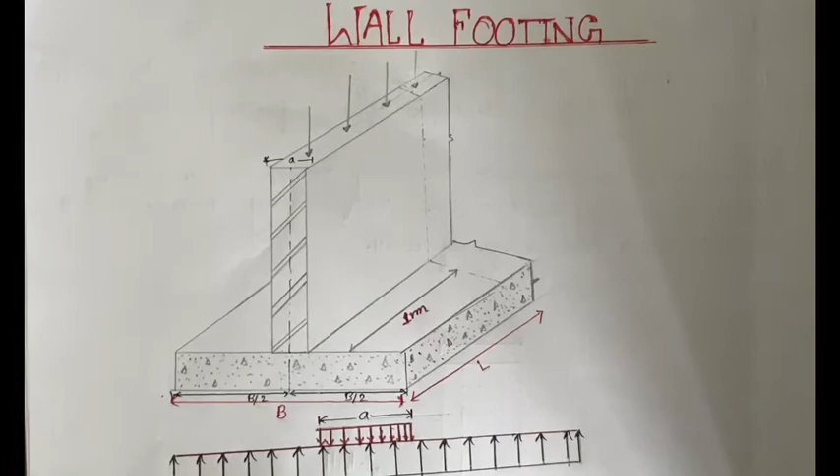अगर जितने भी वॉल जो भी कंस्ट्रक्शन एरिया है दैट इज L इंटू बी, इसके साइड साइड वॉल होंगे, तो जितने भी वॉल होंगे उसके नीचे पूरे पोर्शन में फाउंडेशन देना ही वॉल फुटिंग होता है। मतलब जो भी वॉल है कंस्ट्रक्शन या स्ट्रक्चर में बेस का, उसके पूरे वॉल में फाउंडेशन प्रोवाइड करना इज द वॉल फुटिंग। पहले क्या हो रहा था कि कॉलम में फुटिंग प्रोवाइड कर रहे थे।

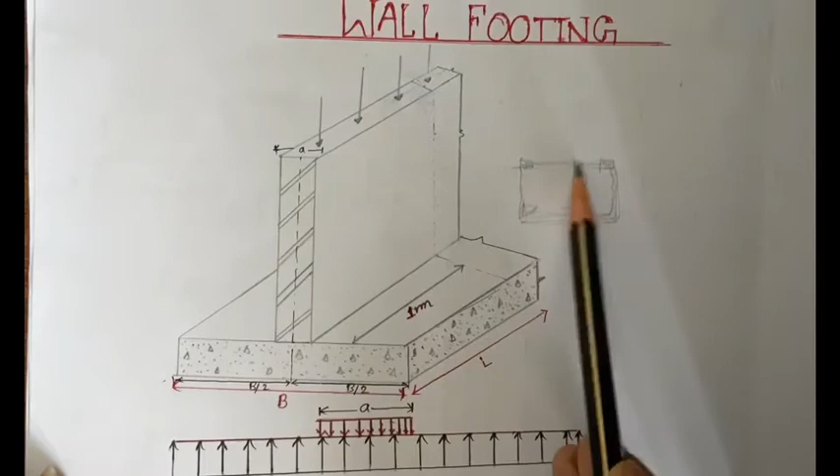यहाँ जैसे कॉलम है तो उसके लिए जो बेस प्रोवाइड कर रहे थे फुटिंग, यहाँ कॉलम है, यहाँ कॉलम है, तो उसके लिए फुटिंग प्रोवाइड कर रहे थे। अब वॉल फुटिंग में क्या करना है कि जो भी हमारा स्ट्रक्चर है, जो भी हमारा वॉल है, उसके पूरे वॉल में फुटिंग प्रोवाइड करना इज द वॉल फुटिंग।

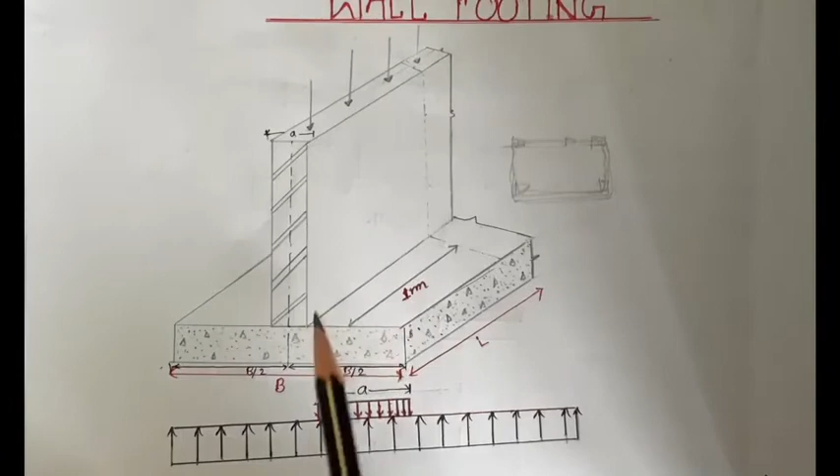सो दिस इज द फिगर फॉर द वॉल फुटिंग। This is the wall and this is the footing for the wall. B, width of the footing, and this is the thickness or depth of the footing, and this is the L. L कंटिन्यूटी साइन से मैंने दिखाया है क्योंकि लेंथ जितना भी वॉल का होगा वहाँ तक कंटिन्यू करेगा लेंथ ऑफ द फुटिंग। जितना भी वॉल का लेंथ होगा क्रॉस सेक्शन का उतना ही फुटिंग का भी लेंथ होगा, इसलिए मैंने 1 मीटर शो करा है कि हम जो डिजाइनिंग करेंगे वो लेंथ इक्वल टू 1 मीटर लेंगे क्योंकि कंटिन्यू कर रहे हैं। जितना मीटर का वॉल होगा उतना मीटर लेंथ फुटिंग का होगा।

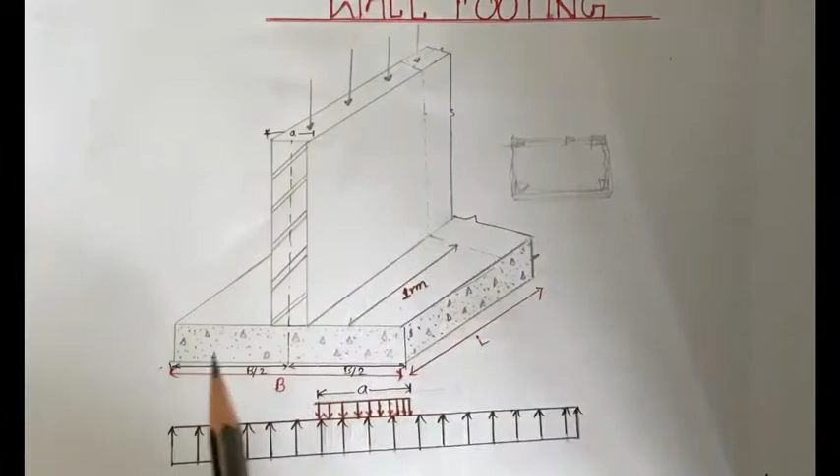यहाँ हमें विड्थ फाइंड करना है, डेप्थ फाइंड करना है, और जो L हम लोग यूज करेंगे वो 1000 mm लेके चलेंगे। This is our wall and load is coming here and transferring to this footing. So a footing regarding all the wall is known as wall footing.

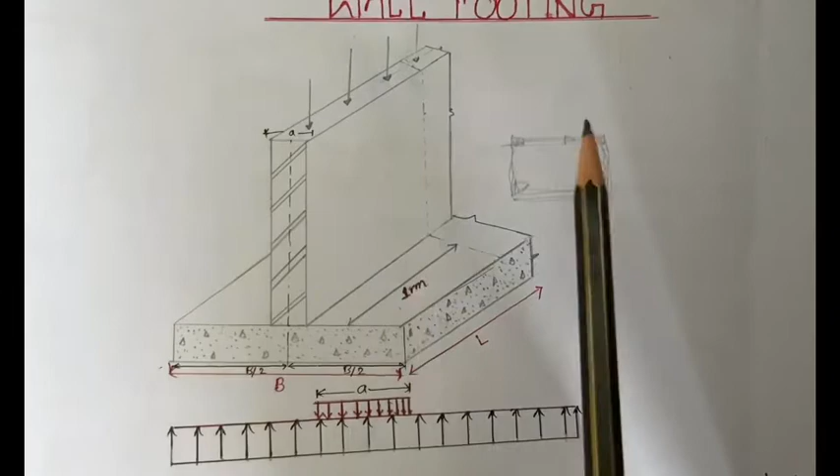This is the soil bearing pressure and this is the load coming on it. This is the footing and this is the earth pressure, SBC, soil bearing capacity, and this is the load coming through the wall on the footing. Here is the definition for wall footing.

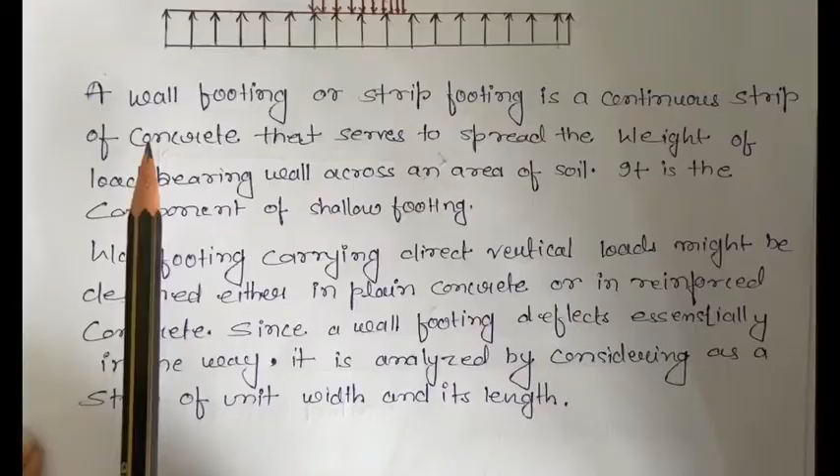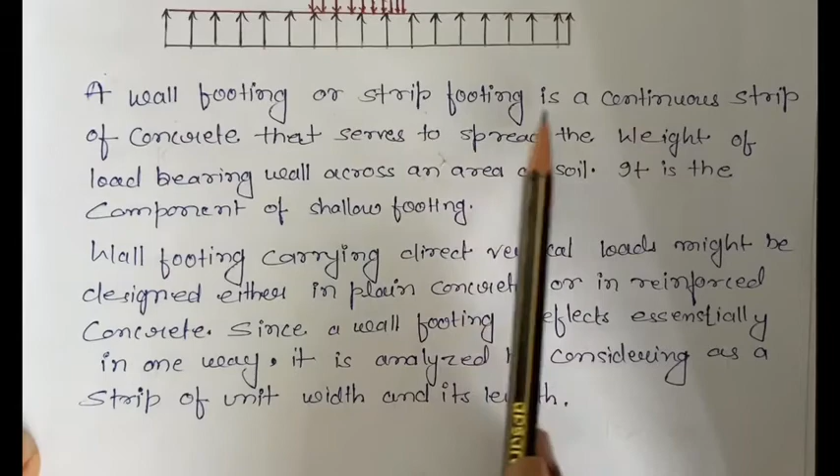A wall footing or a strip footing, wall footing is also known as strip footing, is a continuous strip. Continuous strip in the sense कि जितना भी वॉल होगा उसके continuous footing देते जाएंगे। So it is a continuous strip of concrete that serves to spread the weight of the load bearing wall across an area of the soil.

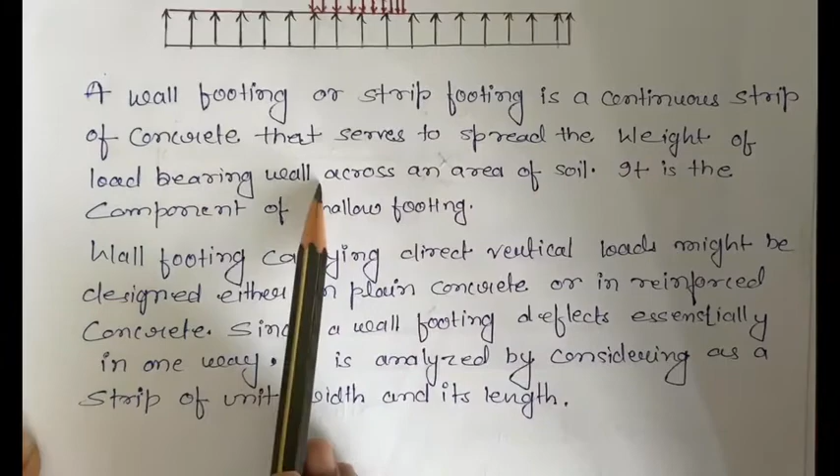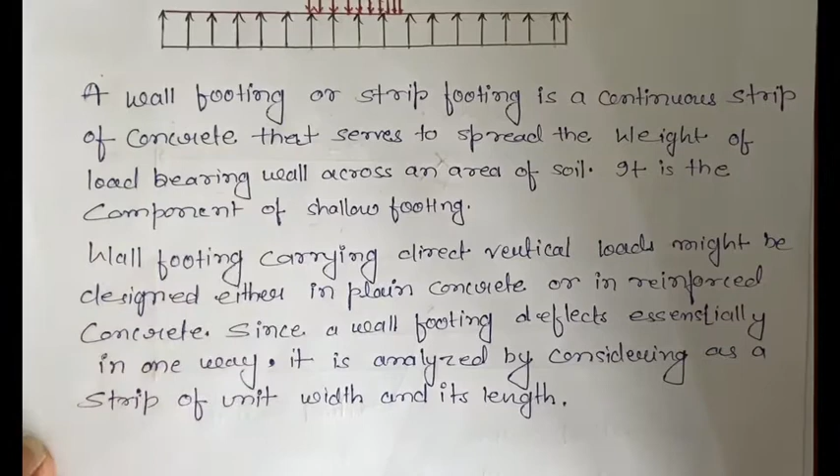It is the component of shallow footing. Wall footing is the part of the shallow footing. एंड वॉल फुटिंग, जो हमारा वॉल का फुटिंग हो गया वो क्या वियर करता है, जो हमारा लोड वियरिंग वॉल है वो लोड जो ट्रांसफर कर रहा है स्ट्रक्चर का वो हमारा वॉल फुटिंग वियर करता है।

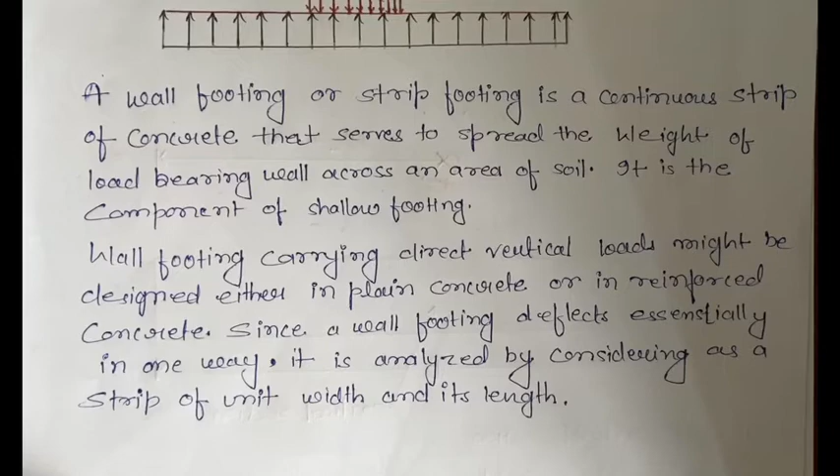लोड वियरिंग वॉल जो ब्रिक वॉल है, साइड का वॉल, पार्टीशन वॉल जो ब्रिक से बनाया गया है दैट इज लोड वियरिंग वॉल। एंड जो पार्टीशन वॉल कहीं कहीं होता है ऑफिस वगैरह में, या जब हम पार्टीशन वॉल देते हैं प्लाईवुड से, ग्लास से, इन दैट केस दैट इज नॉट आ लोड वियरिंग वॉल, दैट इज ओनली अ पार्टीशन वॉल विच इज नॉट टेकिंग एनी लोड ऑफ द स्ट्रक्चर।

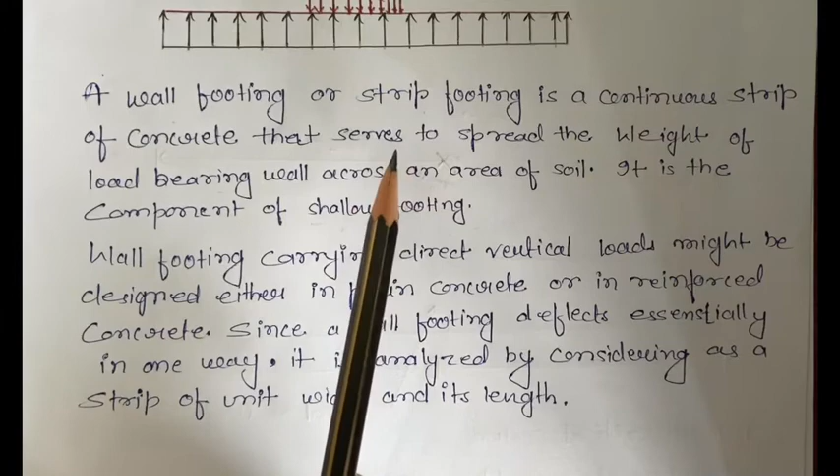लोड वियरिंग वॉल क्या होता है, जो ब्रिक वॉल है जो हमारे स्लैब से कनेक्टेड होगा दैट इज द लोड वियरिंग वॉल। Wall footing carrying direct vertical load might be designed either in plain concrete or in reinforced concrete.

Since a wall footing deflects essentially in one way, it is analyzed by considering it as a strip of unit width and its length.

Wall footing है, कैरी कर रहा है डायरेक्ट लोड, माइट बी डिजाइन आइदर बाय प्लेन कंक्रीट, या तो प्लेन कंक्रीट के थ्रू हमने डिज़ाइन कर रखा हुआ ये फुटिंग को, और रिइनफोर्स कंक्रीट। जब फुटिंग हम लोग कंस्ट्रक्ट करते हैं तो हमारे पास ऑप्शन है कि प्लेन कंक्रीट के थ्रू भी कास्ट कर सकते हैं हमारा फुटिंग, और रिइनफोर्स कंक्रीट के थ्रू भी फुटिंग को कास्ट कर सकते हैं।

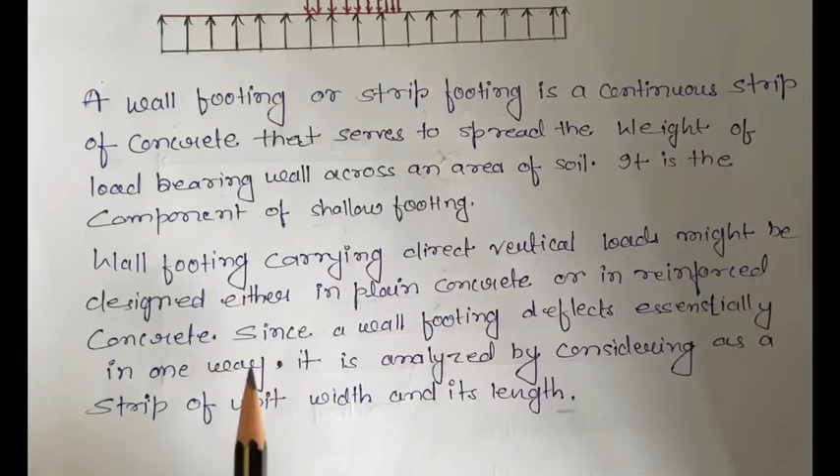सिंस अ वॉल फुटिंग इज डिफ्लेक्ट इसेंशियली इन वन वे, ये हमारा वॉल फुटिंग का प्रॉपर्टी है कि जो डिफ्लेक्ट करता है ओनली वन वे डिफ्लेक्ट होता है। It is analyzed by considering it as a strip of unit width and its length.

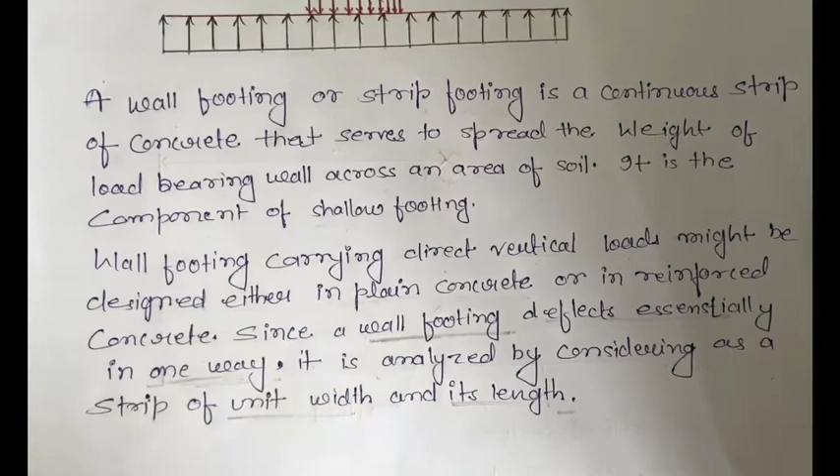Now for bending moment in wall footing. Bending moment का calculation कैसे होगा wall footing में?

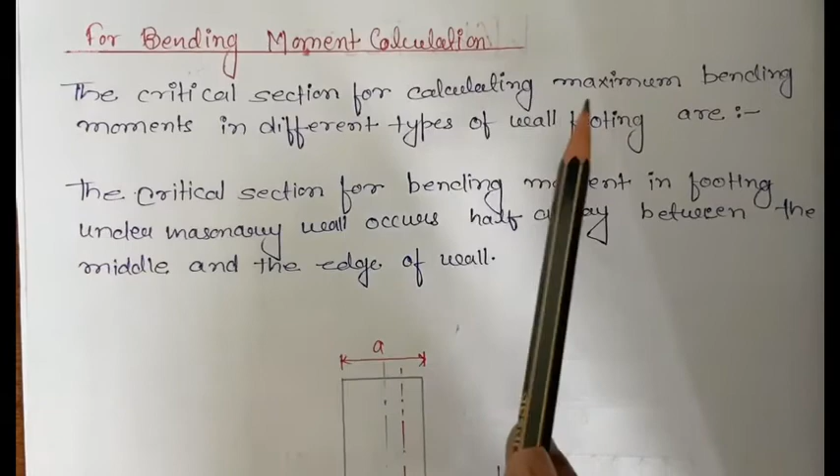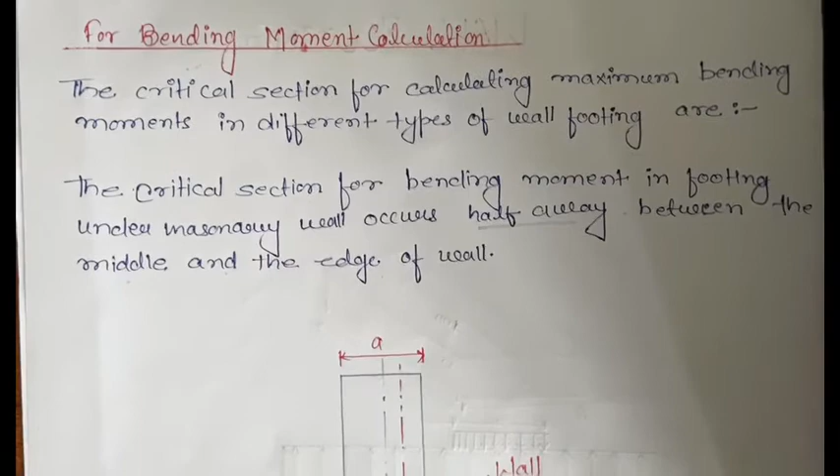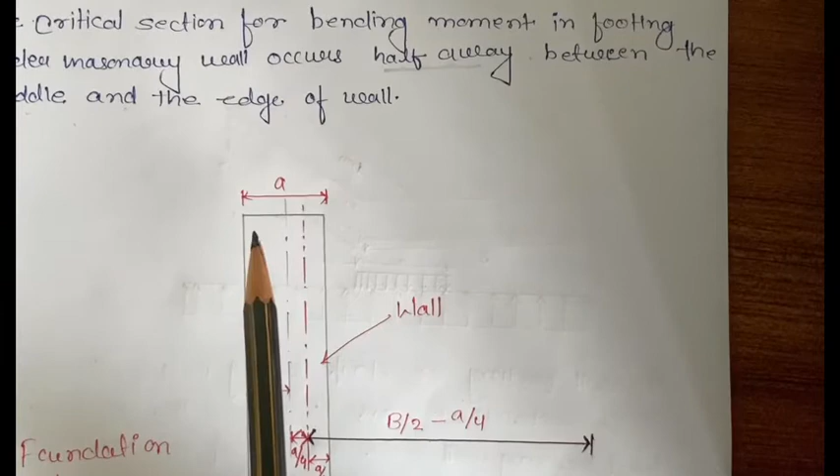The critical section for the calculation of bending moment in the different type of wall footing: the critical section for the bending moment in the footing under the masonry wall occurs half away between the middle and the edge of the wall. जो हमारा critical section develop हो रहा है, यहाँ develop हो रहा है, that is the half away between the middle and the edge of the wall. Okay, this is our critical section.

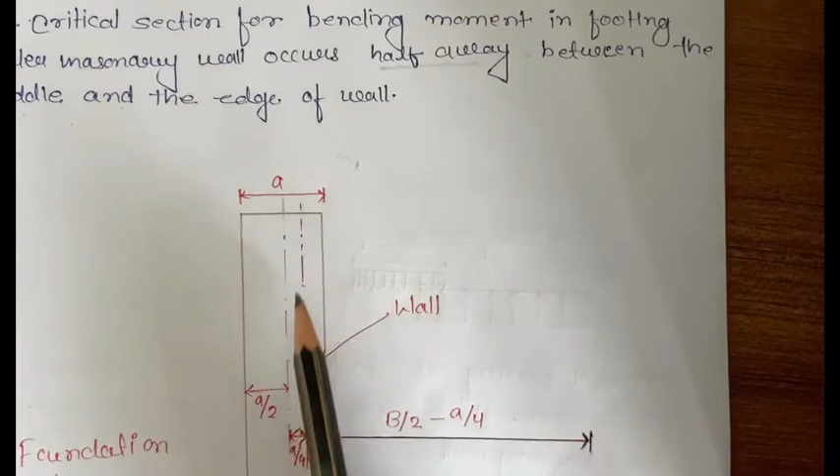This is the thickness of the wall and this is the midpoint of that wall. The critical section for the wall footing lies between this point and its middle.

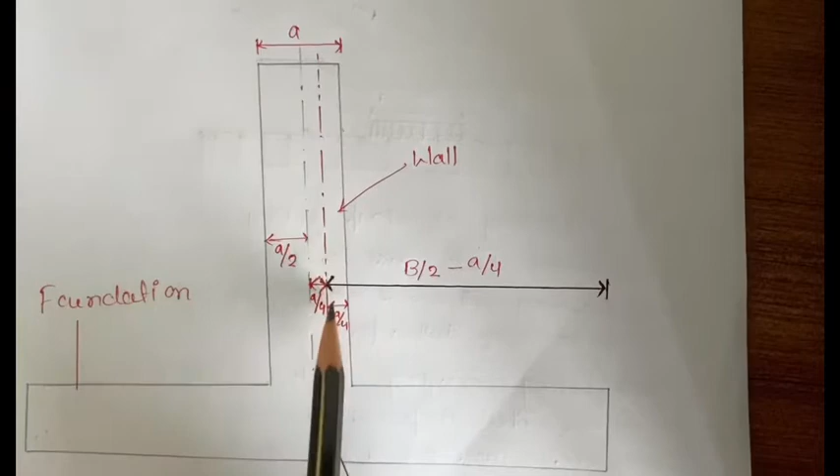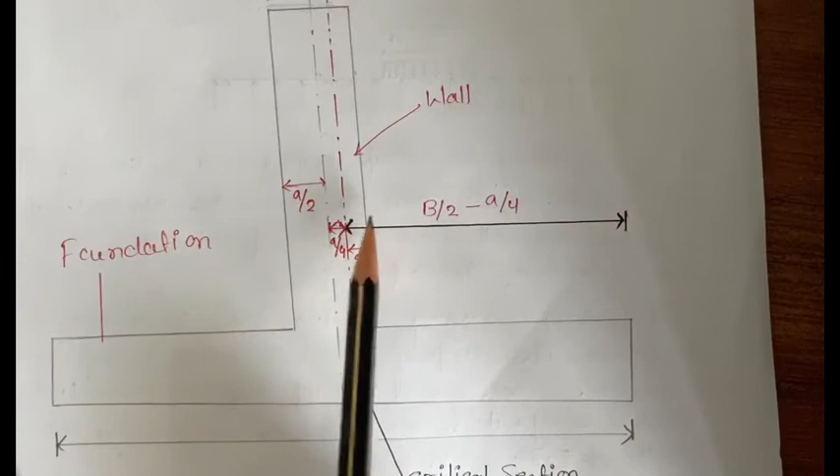This is the figure for the wall footing. This is the thickness of the wall and this is the footing. Here to here the length is B by 2, that is this is B and this is half of B. So up to this length B by 2, subtracting this length minus A by 4. So from here to here the length is B by 2 minus A by 4. This is the critical section line.

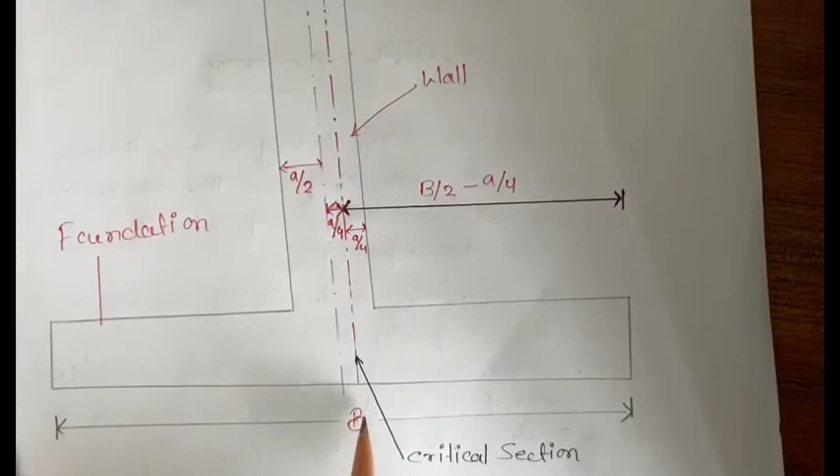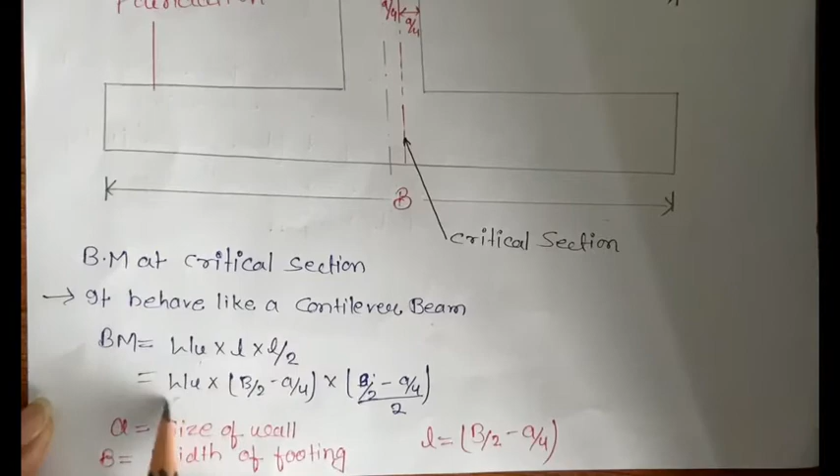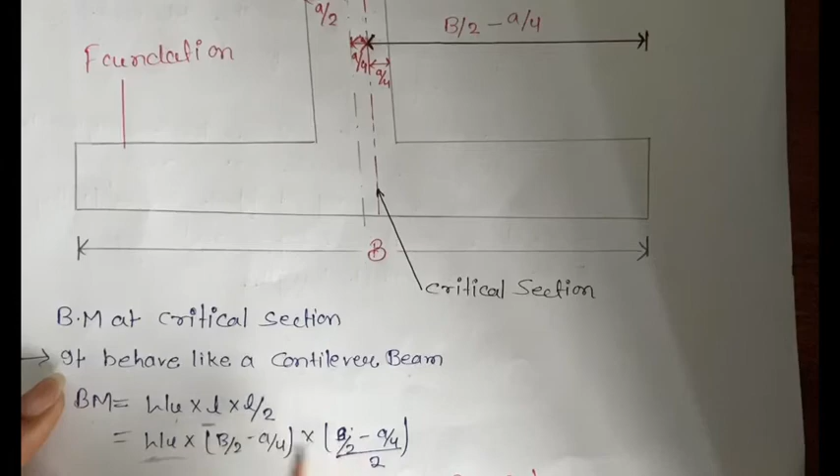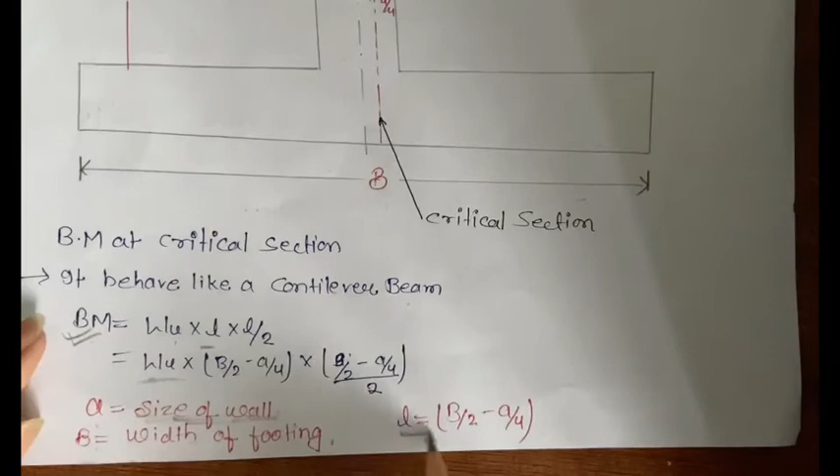Bending moment at critical section behaves like a cantilever beam, since our wall footing behaves like a cantilever beam. So bending moment equals WU into L into L by 2. WU is the load given, and B by 2 minus A by 4 is the length. We need to find bending moment at the critical section, so we multiply this length into the load. So it is B by 2 minus A by 4, into B by 2 minus A by 4 divided by 2. This is the bending moment formula for the wall footing. A is the size of the wall, that is the thickness of the wall, B is the width of the footing, and L is B by 2 minus A by 4.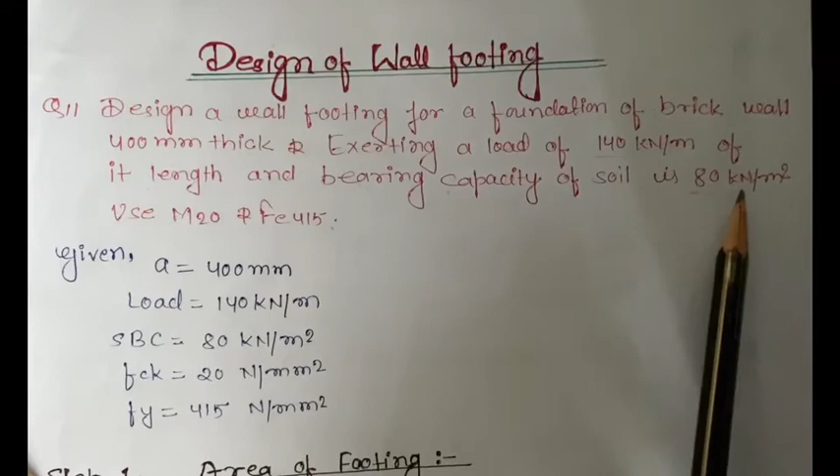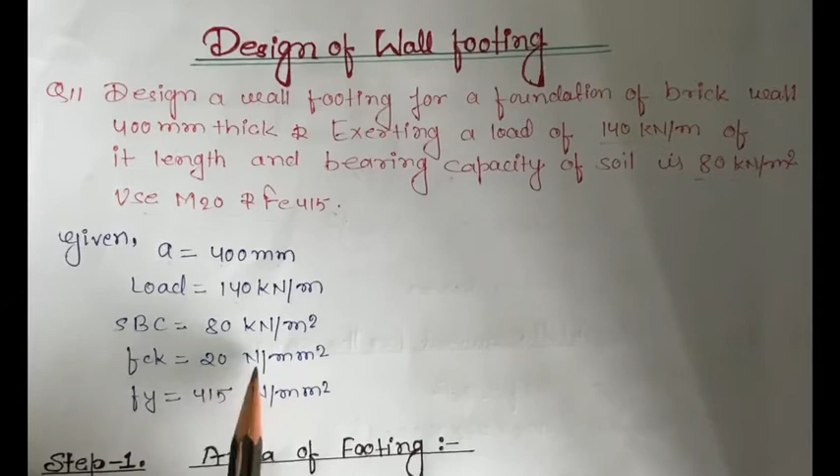Now we will go for the design of the wall footing. Design a wall footing for a foundation of a brick wall 400 mm thick, exerting a load of 140 kN per meter length, and the bearing capacity of the soil is 80 kN per meter square. Use M20 and Fe415. So the given data is: A equal to 400 mm, which is the size of the wall, load equal to 140 kN per meter, SBC soil bearing capacity is 80 kN per meter square, FCK equal to 20 Newton per mm square, and Fy equal to 415 Newton per mm square.

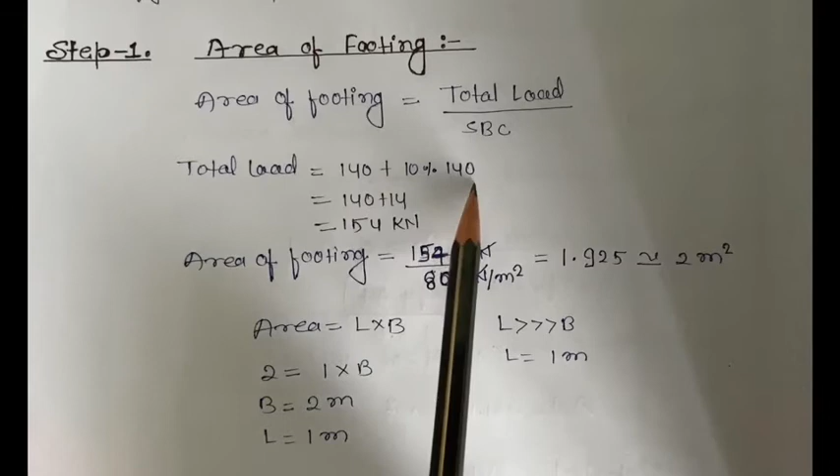In step one we have to find out the area of the footing. Area of footing equals total load divided by SBC. Total load equals 140 plus 10% of 140, that is 140 plus 14, which is 154, the total load. So total load divided by SBC, soil bearing capacity: 154 divided by 80 equals 1.92, approximately 2 meter square for the area of the footing.

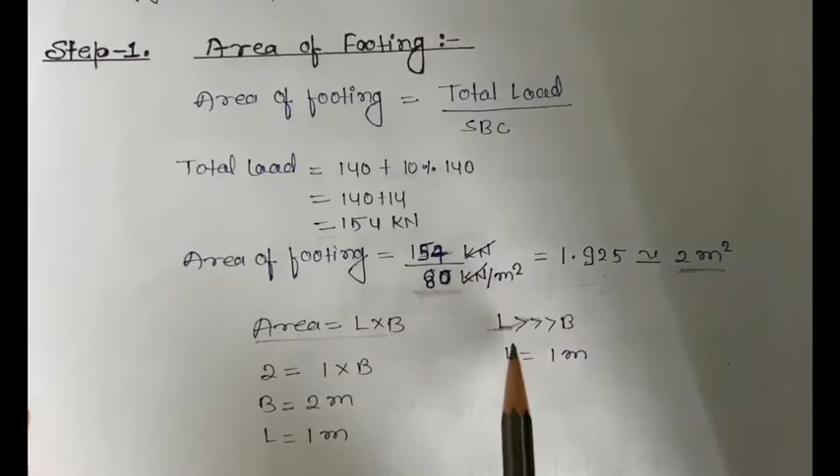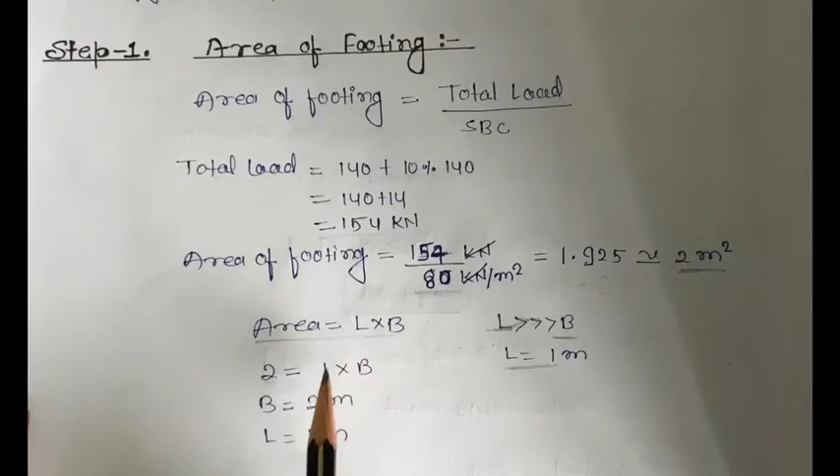The area of our footing should be 2 meter square. Area equals length into B. The length will be as much as the wall length, since wherever the wall is, we need to provide footing alongside it, so the length will be equal to the wall's length. So we are taking L as 1 meter. Now we will find B. So 2 meter square is the area, L we are taking as 1, and B we have to find, so B equals 2 meter and L equals 1 meter.

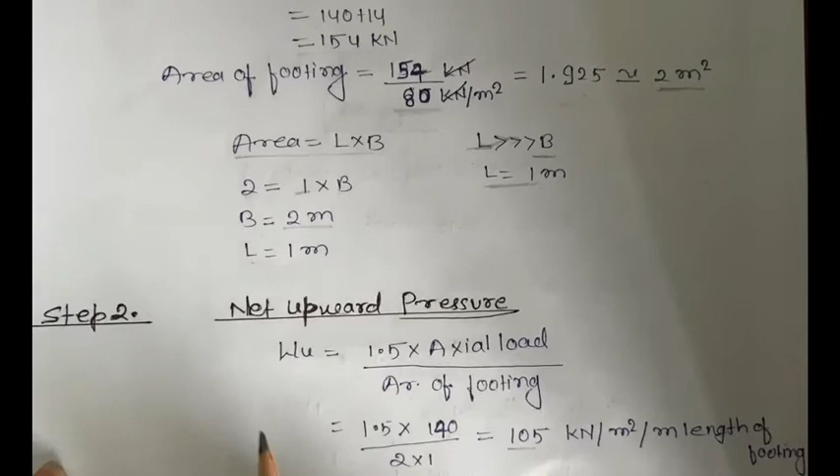In the next step we have to find out the net upward pressure. W equals 1.5 into axial load divided by area of footing. Axial load is 140 kilonewton, factored by 1.5, divided by area of footing, which is 2 into 1 (2 is B and 1 is the length of the footing). So we get 105 kilonewton per meter square per meter length of the footing. This value, the net upward pressure, is for one meter length of footing. For 1 meter it is 105, and for any other length it will be multiplied accordingly. So the value we calculated, net upward pressure W, is 105 for 1 meter.

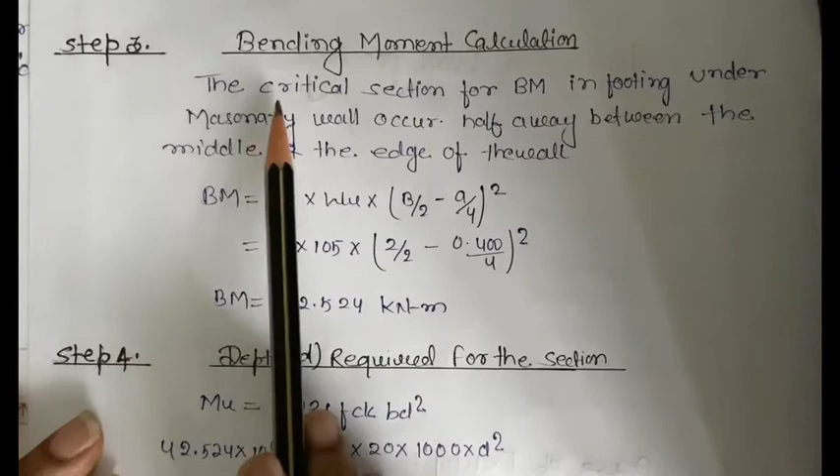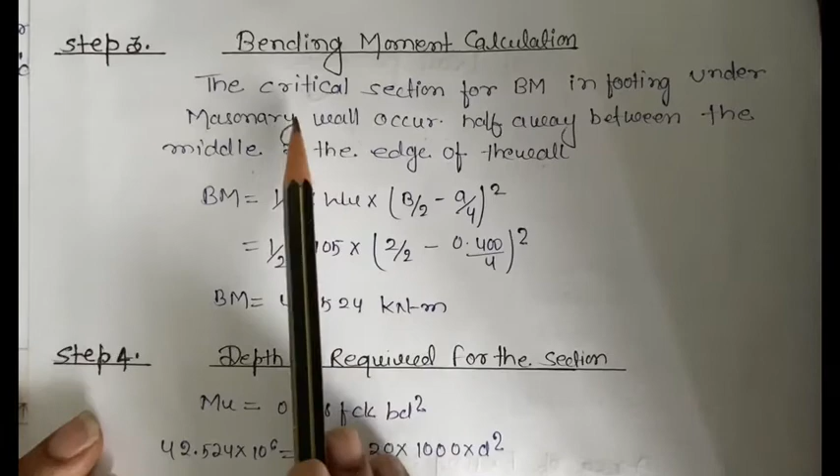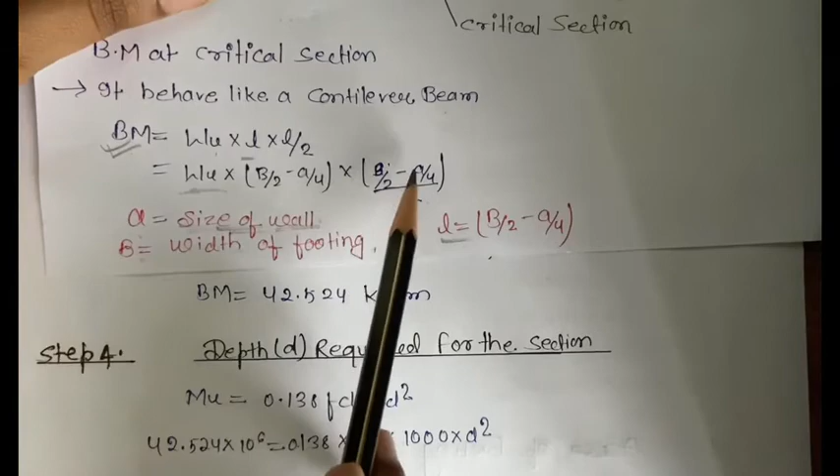Now we have to find out the bending moment calculation. The critical section for bending moment in the footing under the masonry wall occurs halfway between the middle and the edge of the wall. As we just studied, the critical section develops halfway from the middle to the edge of the wall. So bending moment equals half into WU into B by 2 minus A by 4 squared. This formula we are using is WU into B by 2 minus A by 4, into B by 2 minus A by 4, squared, and multiplied by 1 by 2. This is the same formula I showed earlier.

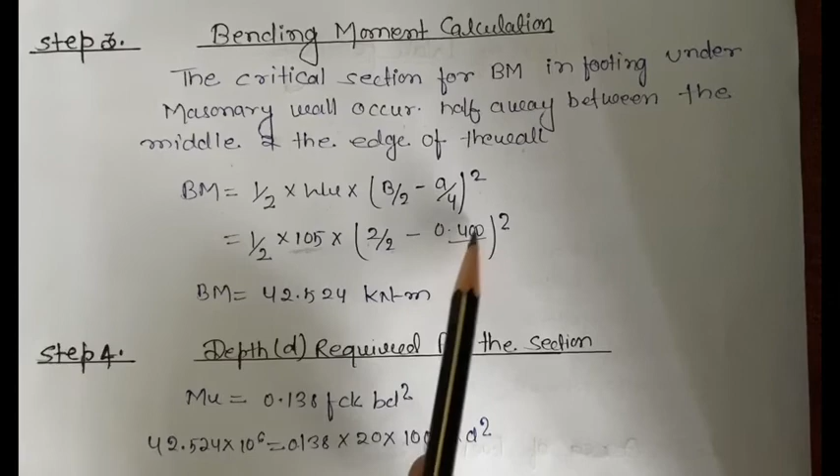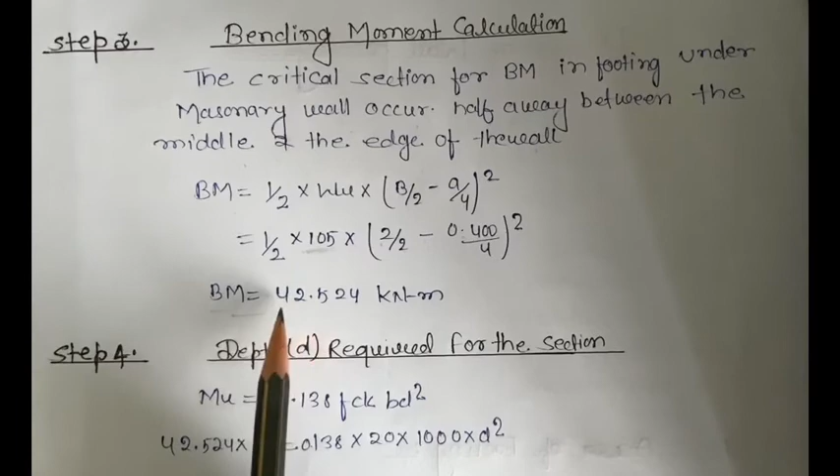Half, W equals 105 as we found, and B equals 2 divided by 2 minus 0.400. A is the size of the wall, which is 400 mm, divided by 4, squared. So we get bending moment equal to 42.524 kilonewton metre.

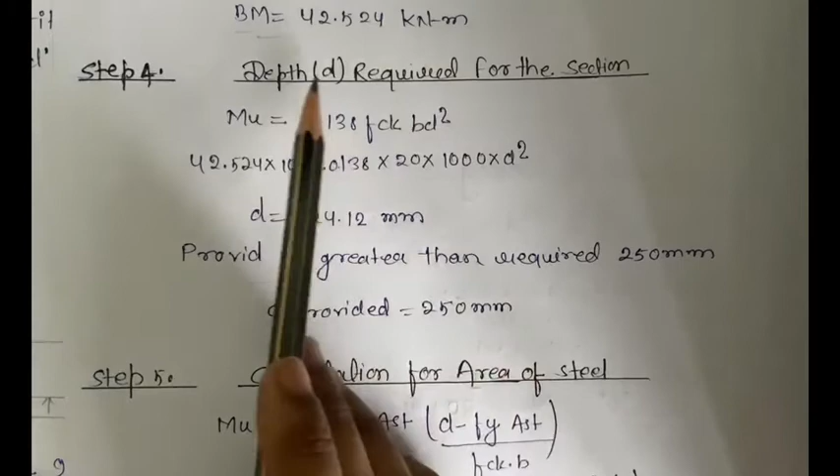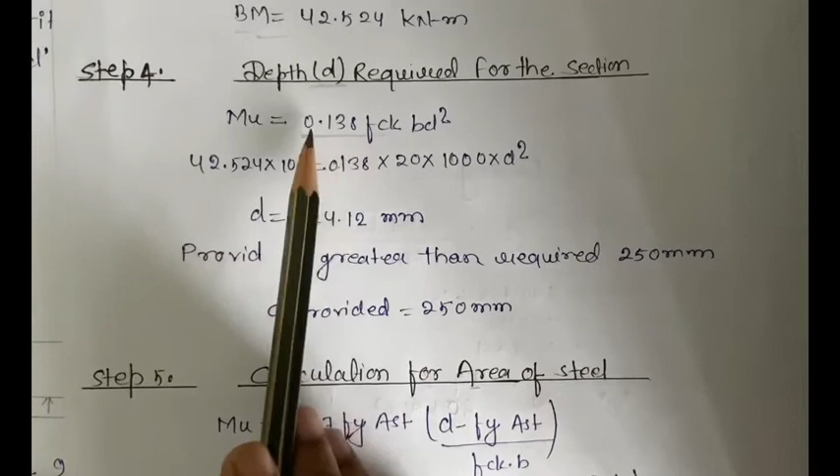Now step 4, calculation for the depth required for the section. Mu equals 0.138, which we take for Fe415 grade of steel, into FCK into BD square. So Mu equals 42.524 into 10 to power 6, equals 0.138 into FCK equal to 20, into B equal to 1000, into D square.

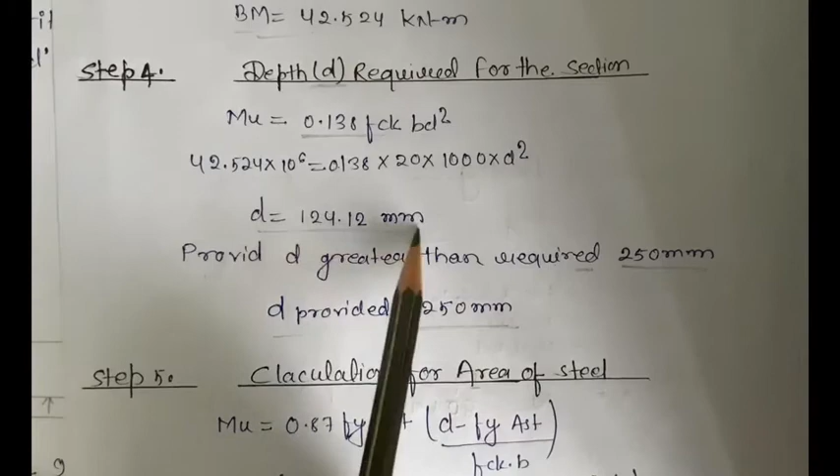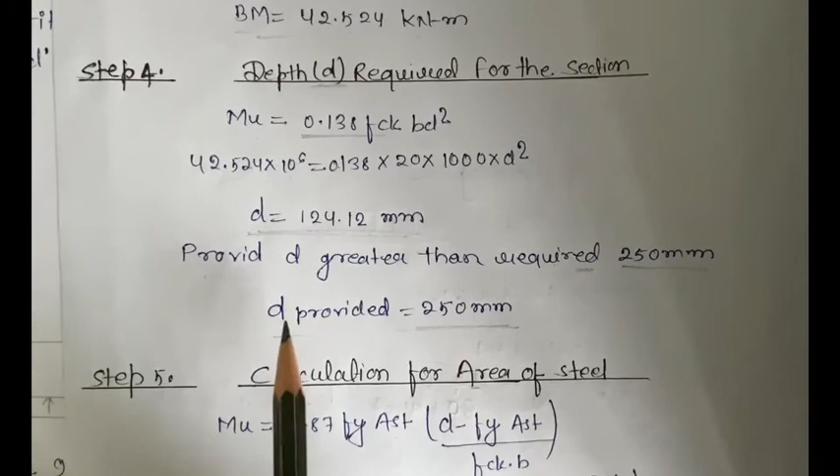So D equal to 124.12. Provide D greater than required, so we are providing 250. This is the depth found out by calculation, but whatever depth comes out, we must provide more than that required value. So we are providing here D equal to 250 mm. The depth of the footing is 250 mm.

Calculation for the area of steel. After the bending moment, we will go for the AST. The formula is mu equal to 0.87 Fy AST (D minus Fy AST divided by FCK into B). By putting all values, we have AST equal to 491.13 mm square.

So percentage of steel equal to AST divided by B into D into 1000, and by solving this we get percentage of steel equal to 0.19%.

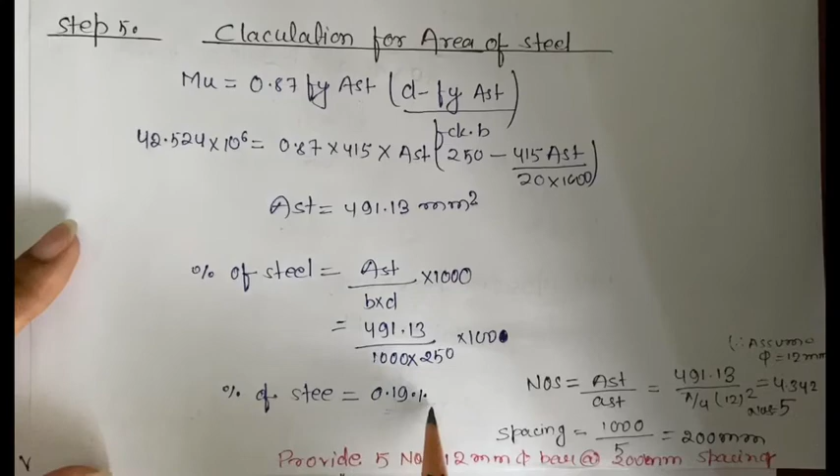Number of bars equal to AST divided by small ast, the area of one bar. So AST equal to 491.13, and small ast, assuming diameter of bar is 12 mm, gives 4.342. Similarly, number of 5 bars we are using.

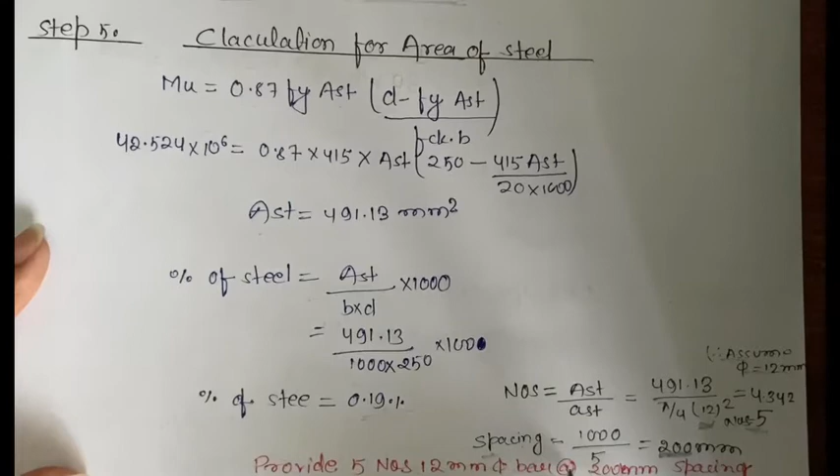Spacing between the bars will be spacing equal to 1000 by 5, so we have 200 mm spacing. So provide 5 numbers of bar of 12 mm diameter at the rate 200 mm center to center spacing.

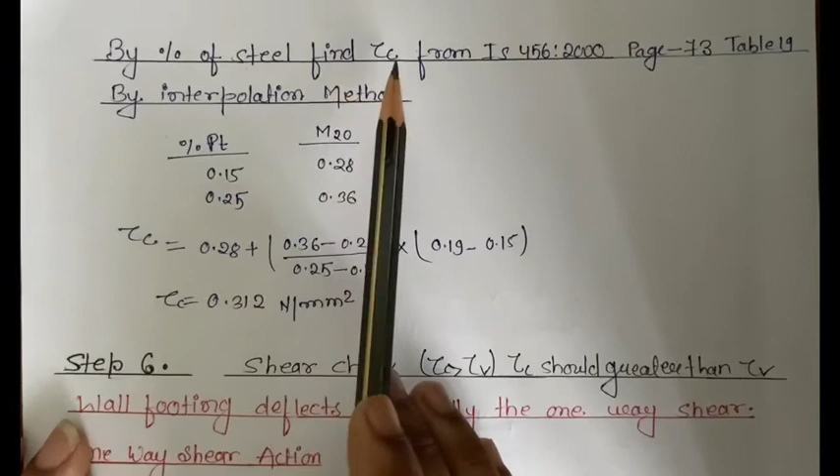Now by the help of percentage of steel found out earlier, that is 0.19%, we will find tau c for shear. We will check whether shear reinforcement is needed or not.

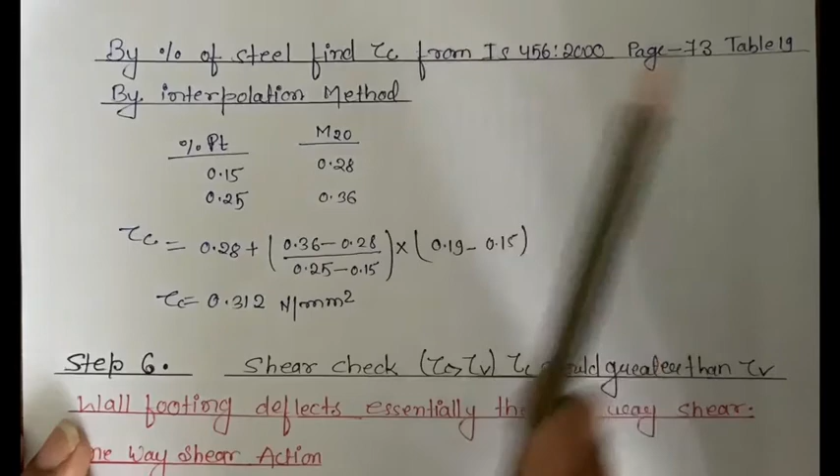So tau c from IS 456, page number 73, table number 19, by interpolation method, percentage of steel 0.19 lies between 0.15 and 0.25, and grade of concrete we have M20, which we are using in the wall footing.

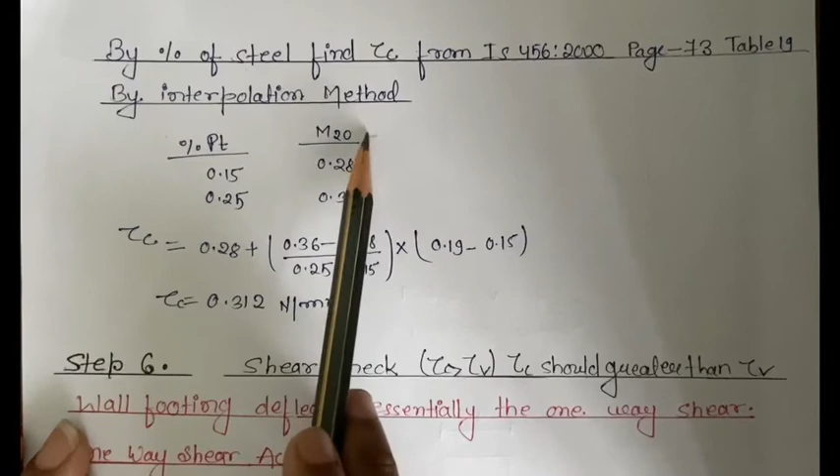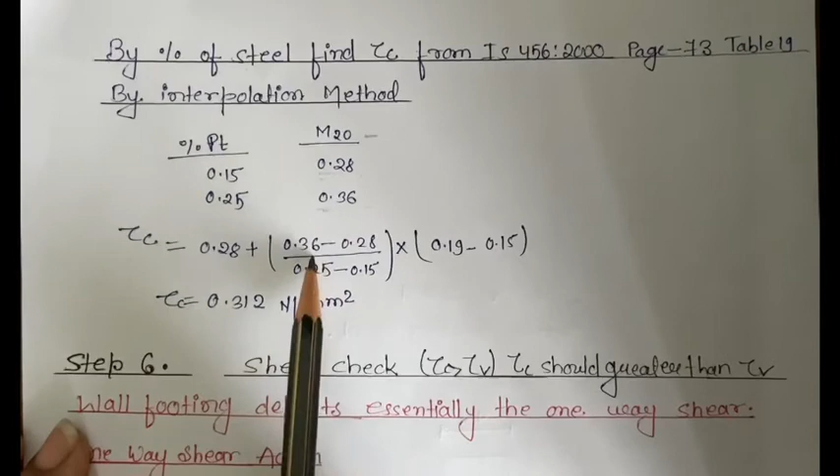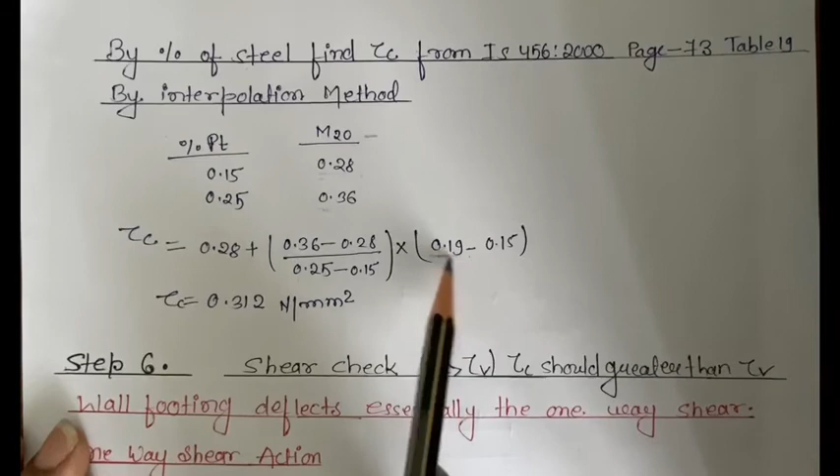By interpolating this value: 0.28 plus (0.36 minus 0.28) divided by (0.25 minus 0.15), into (0.19 minus 0.15), this is the value of percentage of steel. So we have tau c equal to 0.312 Newton per mm square.

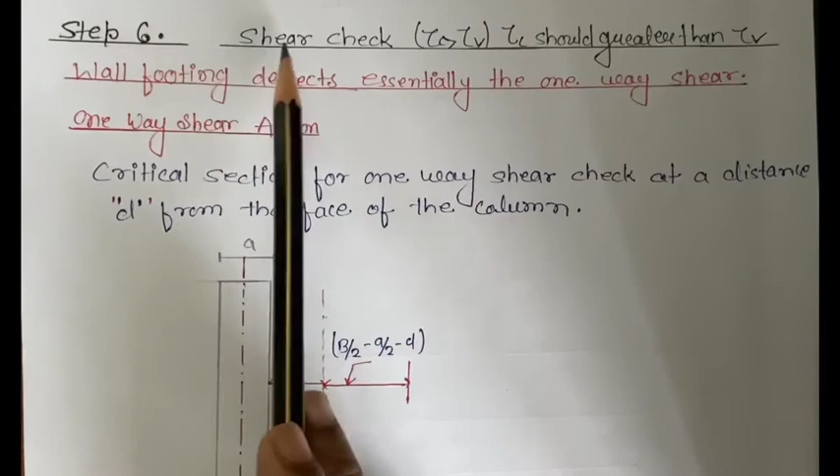In this step we will check for shear: tau c should be greater than tau v, and the wall footing deflects essentially with one way shear.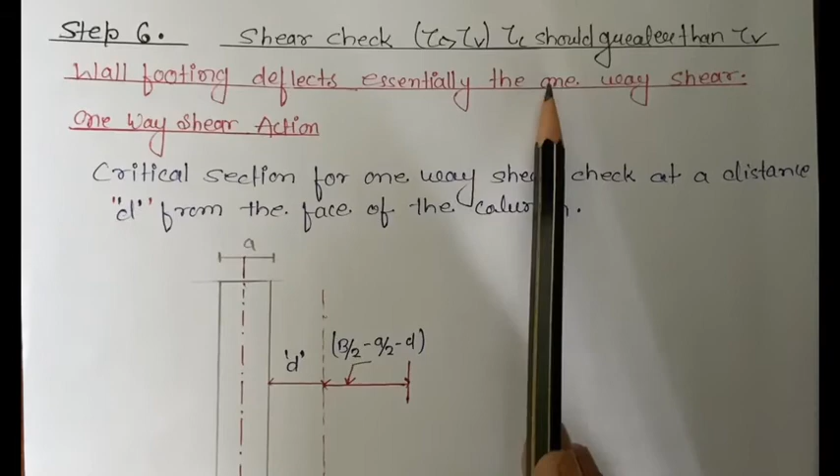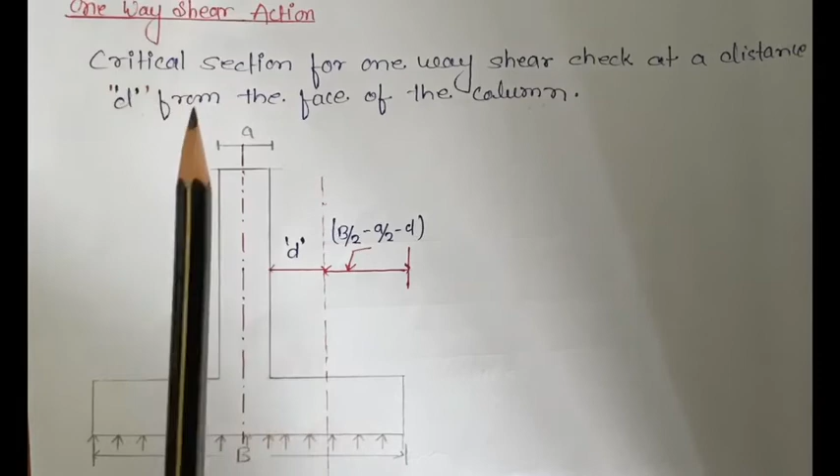In wall footing only one way shear occurs. So one way shear action: the critical section for one way shear is checked at a distance of d from the face of the column. Wherever this critical section for shear checking lies, it is at distance d from the face of the column, and d is the depth of our footing. So at whatever depth the footing has, at that same distance the critical section lies for checking one way shear.

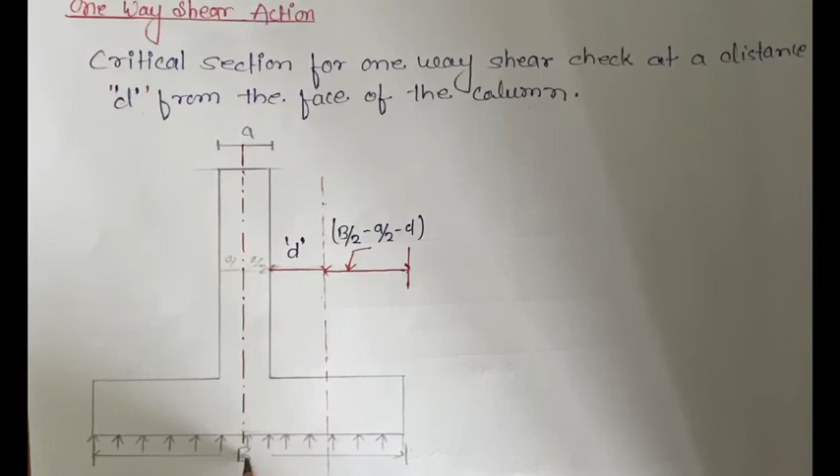The critical section for one way shear lies here, this is the distance after subtracting this. So b by 2 up to here, this is b by 2 of whole b, and this is b by 2 minus a by 2, this is a by 2. So b by 2 minus a by 2 minus d, this depth.

V equal to intensity into area of the critical section. Intensity, that is wu, we have the load, and area of critical section is b into L. So b equal to b by 2 minus a by 2 minus d, into L.

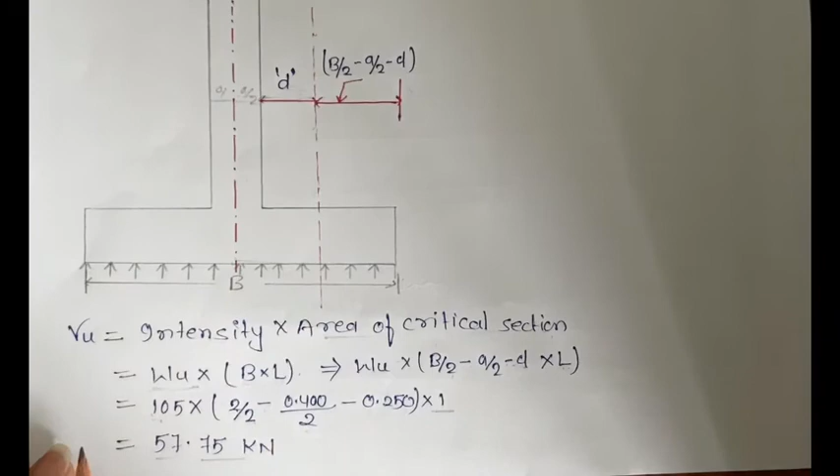So w equal to 105, and b by 2 equal to b equal to 2. So 2 by 2 minus a equal to 0.400, divided by 2, minus d equal to the depth we have taken, 250 mm. So 0.25 meter, into length we are going to take 1000 mm, that is 1 meter. So we have Vu, the shear force, equal to 57.75 kilonewton.

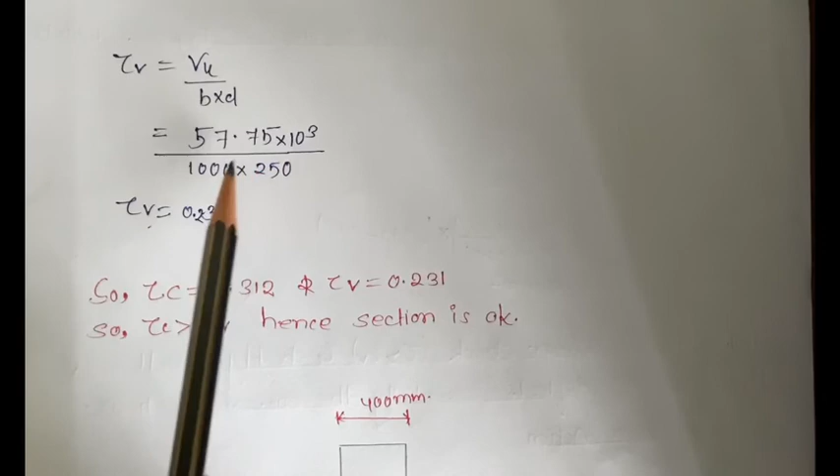Now we will find out tau v equal to Vu by Bd. So Vu we have 57.75 into 10 to power 3, converting to Newton from kilonewton. B equal to 1000 and D equal to 250. So tau v equal to 0.231.

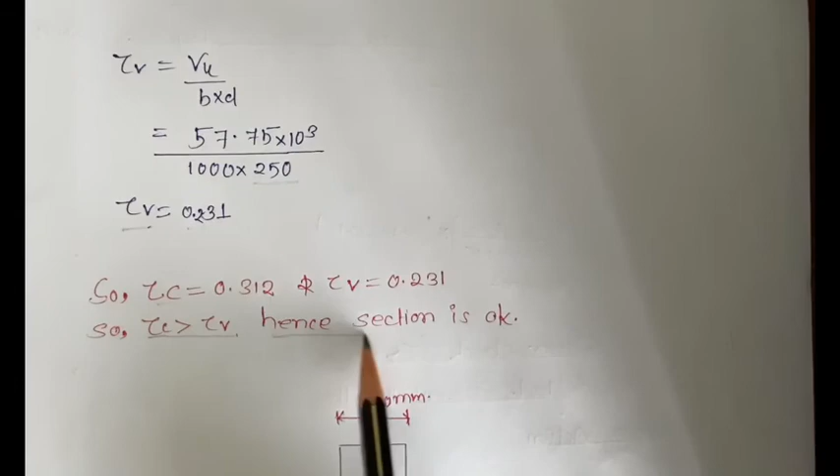So tau c is 0.31 and tau v is 0.231. So tau c is greater than tau v and the section is okay, no shear reinforcement is required.

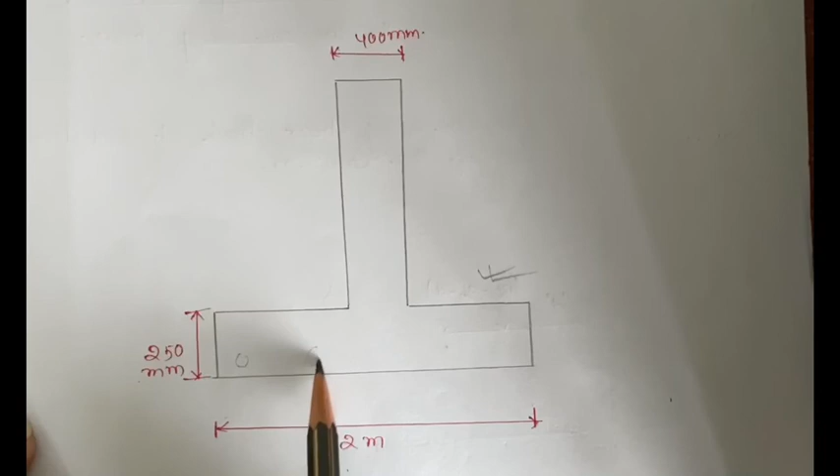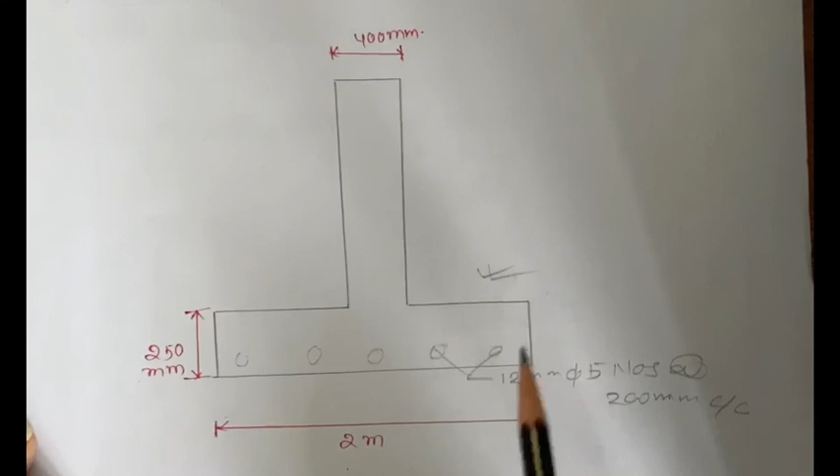So this is the section of the wall footing. We have size of the wall as 400 mm, this is the depth of the footing, and this is the width of the footing, 2 meter. So this is designed, and we will provide here the reinforcement we have found out, that is 5 numbers of bar, 1 2 3 4 5 numbers of bar, 12 mm dia, 5 numbers of bars at the rate 200 mm center to center distance along the length of the footing. Okay, that's it for the wall footing design.